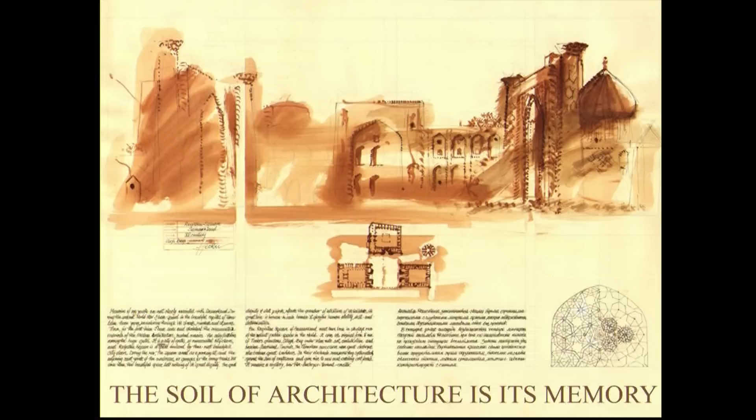Thank you very much for inviting me to give this lecture in memory of Michele, who was an architecture student. I spoke with Silvia, his mother, and I'm very proud to be here.

You should also know that the father of David Palterer, who spoke a few minutes before me, was an architect, and he was like my teacher. So generation after generation, we pay respect back to those who have been our teachers. I see in David Palterer a continuation of what I was studying.

My lecture is not so much about what you see, it's about what you don't see. I came to the conclusion, speaking mostly to architecture students, but here we have another audience, that very little is spoken about what makes architecture, how you make it, what is behind the glossy photographs we see in journals.

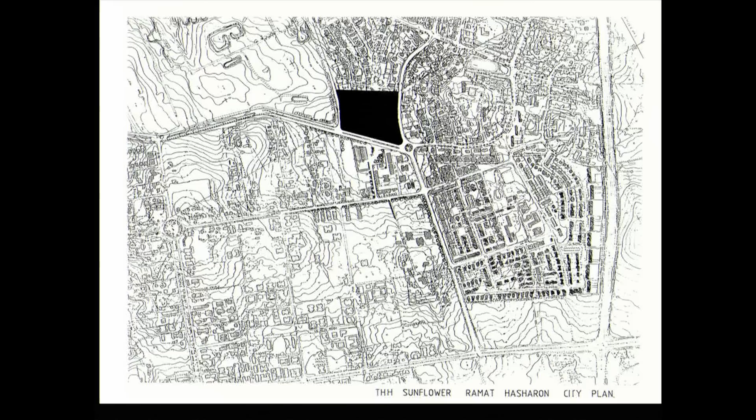This is a project not far from Tel Aviv, in Ramat Hasharon, when I was asked to design a housing project in the center of the city. I started with some sketches, where the round point, the lower point, is a commercial center.

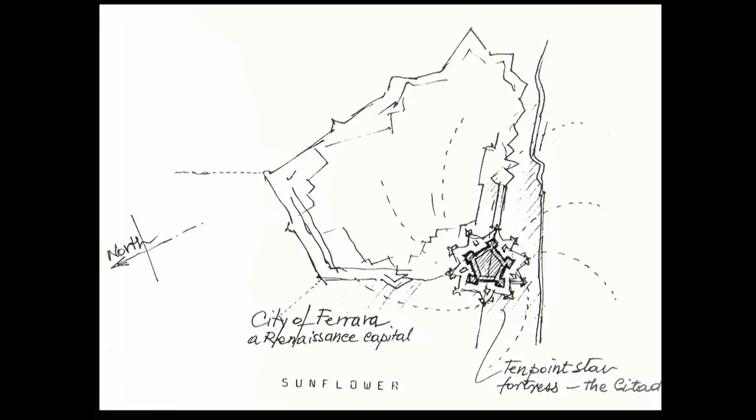In Tel Aviv, since I'm speaking about my work in Israel, there was an exhibition on the city of Ferrara and its walls. I thought that this citadel of Ferrara could help me design my project. The city of Ferrara is now a citadel, but in my design it's the commercial center, which starts to influence the other parts of the project.

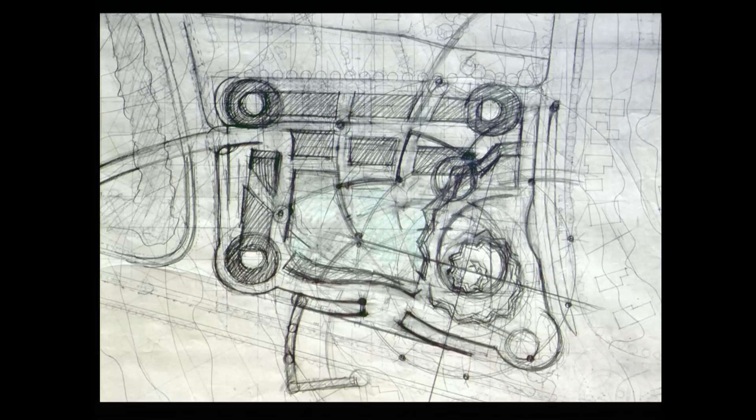You see the development. I still don't know where I am heading, but I am trying. Gradually it became a kind of geometry of a sunflower. So it didn't come directly because I wanted it to be a sunflower, but I borrowed the citadel of Ferrara, and something happened. You see all these drawings which I used as a vehicle to arrive somewhere.

One can say that these drawings are evidence that I don't know what I am doing, because if I knew what I was doing, I would not need to make those drawings. That's the perfect evidence that somebody does not know what to do. But at least it has some form, some maybe beauty.

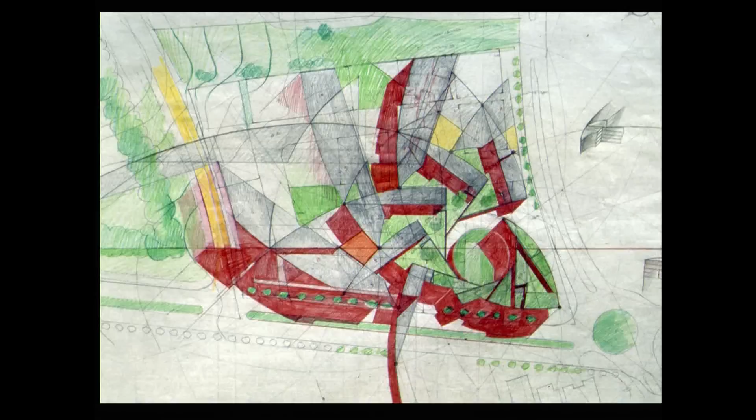And so on and so on. Gradually I know a little bit more about the project, about the destination.

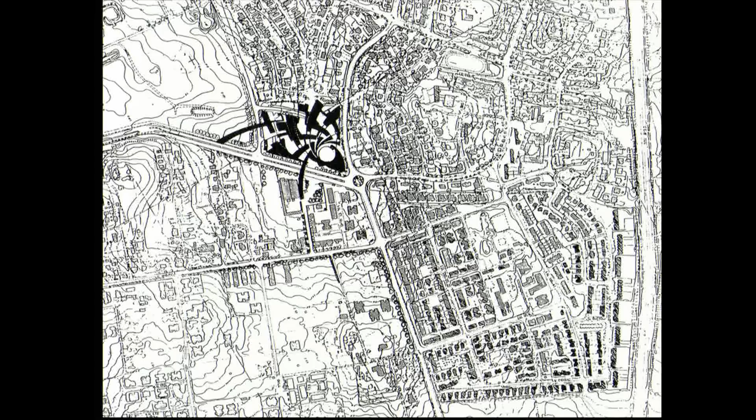And just when I knew already how to build this project, the city of Ramat Hasharon told me, thank you, we are not interested in your project. So it took only four years to arrive at this point. The question is whether this is a lot of lost time, or maybe this investment of four years working on this project is not completely lost time.

And then there comes a project which is letter C. Letter A is a project I did with Alfred Neumann and Eldar Sharon in the 60s, but I'm not speaking about that one now, I'm speaking about a more recent project. C is a kind of spiral building which eventually was built.

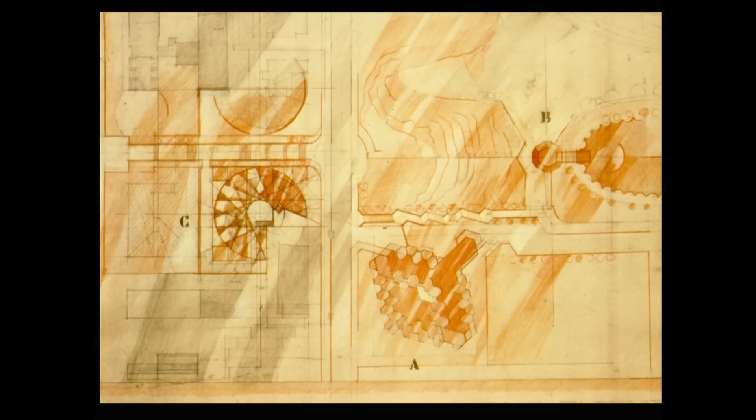It's in Ramat Gan, Israel, not far from Tel Aviv. The spiral was somehow in my mind already for some time. And here you see the building.

I would say that without the work I had done on the first project, it would be difficult to imagine that I could build this one. So, in my opinion, that first project was not totally a waste of time.

This is an apartment building with only 8 apartments, one on every floor. So it's like detached, like a private house on every floor.

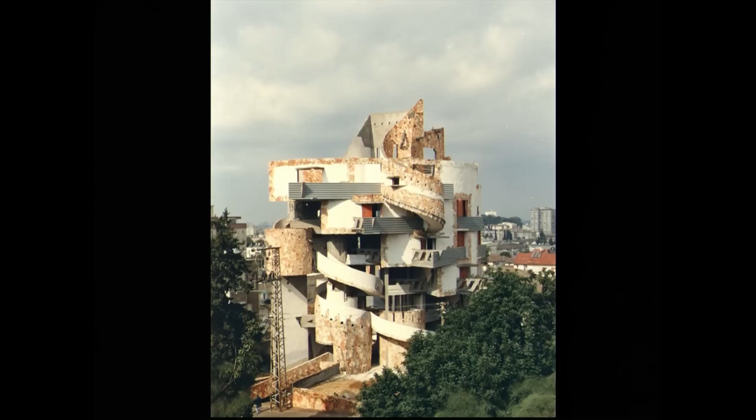The use of material is special, a kind of arte povera. I was supposed to make a project with Mario Merz, but we ended up drinking too much vodka, so nothing came out of it at the end. That was in Torino. He made a beautiful igloo in the Jerusalem Museum, and I was helping, but by the time I came to Torino, there was already too much of this liquid involved.

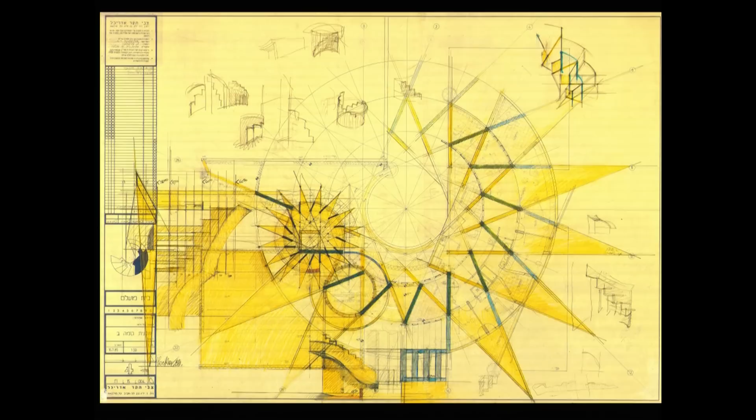And those are some drawings which helped build this project.

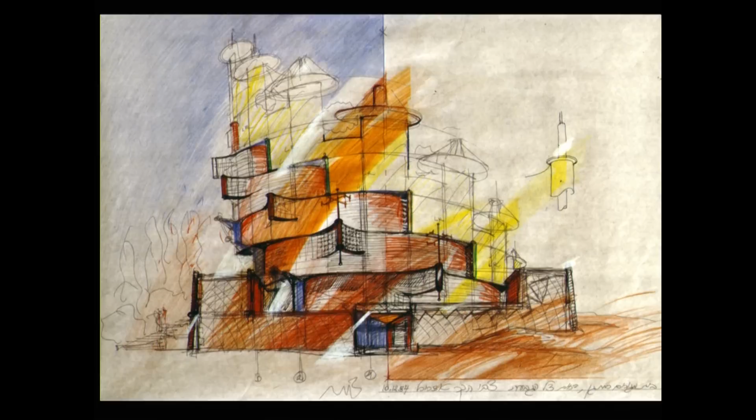All these were made during the work on the spiral and during the construction, because I was living opposite in the so-called Dubiner house, which was designed 20 years earlier. So these drawings were really intended for the construction already.

You see the progress of the images, how the building eventually developed. The development of the special building was also due to the fact that the construction was in the hands of somebody who didn't know how to make a straight angle. So by covering the corners of the building with stone, we camouflaged this impossible kind of work. But eventually it came out okay.

Eventually the normal logic of such a building, every architect will know, is you put in the middle the staircase and the elevator. That would be the most economical and most rational solution. But I wanted to have a courtyard in the middle. So there was another way of solving it, and another rationality.

We also used materials we got for free, like broken mirrors. And this kind of stone is very cheap stone in Israel, hated by all the architects because it has a connotation of cheapness, since many restaurants in Jaffa are covered instead of stucco by this stone. But I thought it's very eloquent, very expressive.

And the view of the terraces.

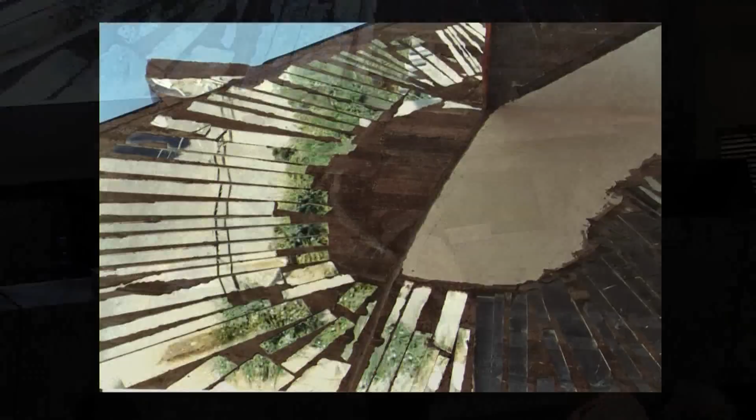Interiors. And the use of mirrors inserted into the concrete before the concrete was cast. Because the expansion of concrete and of glass is the same, they are not broken, they are not falling down.

That's another project which David Palterer mentioned, a school in Germany. I would say that's the next example of something where you still benefit from what you have done before. So here also this spiral movement is very important for the design of the school. But what is more important is the central open court, which was also in the spiral building, but also here.

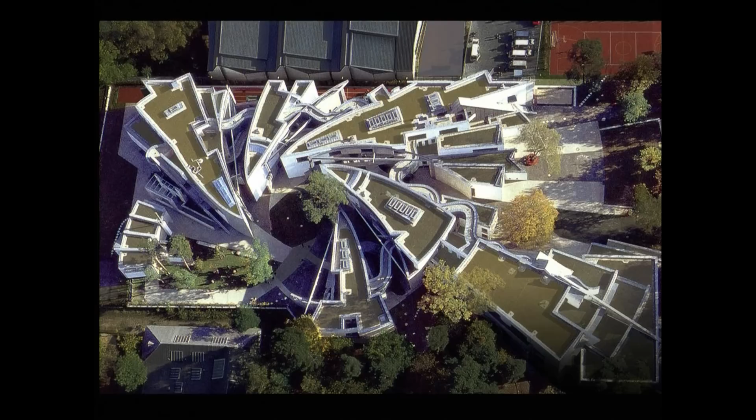So the central space is for humans, not for materials. As we evacuated the stairs and the elevator in the spiral building, the same happens here. The open space is the entrance, and the buildings enclose this space.

That's the geometry done before the computers, so it was done by hand.

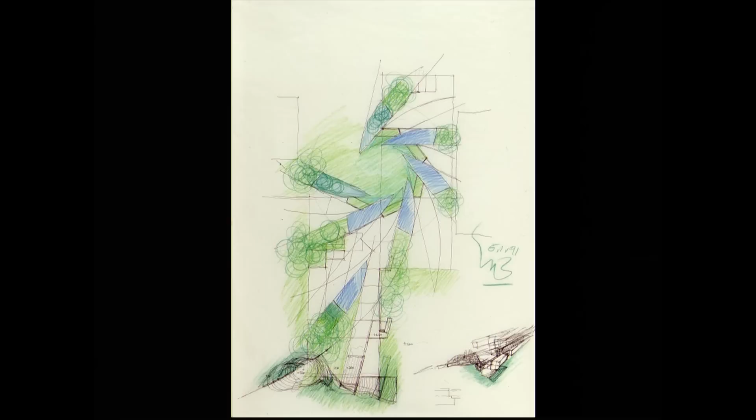And again, some sketches which for me are the way of transport to the unknown destination, which I mentioned before.

As I said before, it's not modesty that I am saying this, but it's really evidence that somebody who is doing it doesn't know where he is heading. He maybe had some more or less direction, but every one of these drawings is a hope that it will bring me closer to something which I believe I should arrive at.

I was so desperate that I introduced even a snake into the design.

Sometimes it's necessary to bring something which doesn't fit into the design, and eventually it breaks, and sometimes it brings a new element. So this element of the snake did a lot of good for the design, because it brought all the pieces together, and the children liked very much running through these corridors.

And that's the entrance. So eventually you don't see any snakes, any sunflowers, and people said that it's like a small city for children. So it's not really a sunflower, but I would say rather a small city.

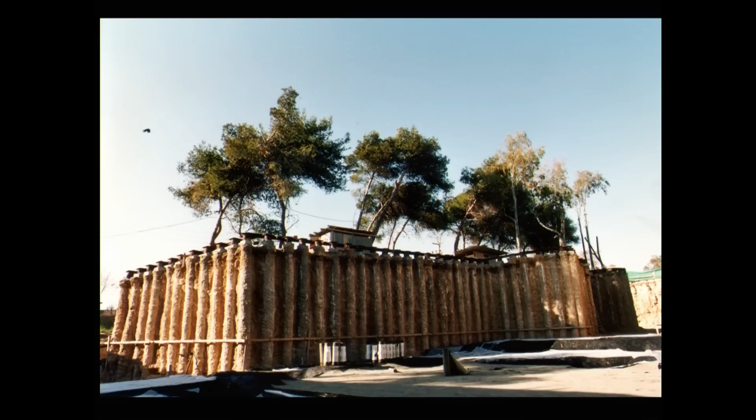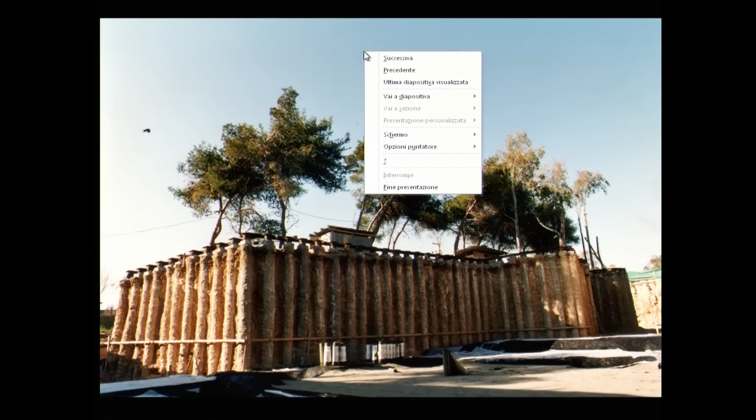So digging for the basement, we had to preserve the trees. In order to preserve the trees, one has to preserve the soil of the trees. So that's the way we preserve the soil, by surrounding it by kind of concrete nails, and then we took out the soil surrounding these nails, and in this process we discover a kind of very fragile stone.

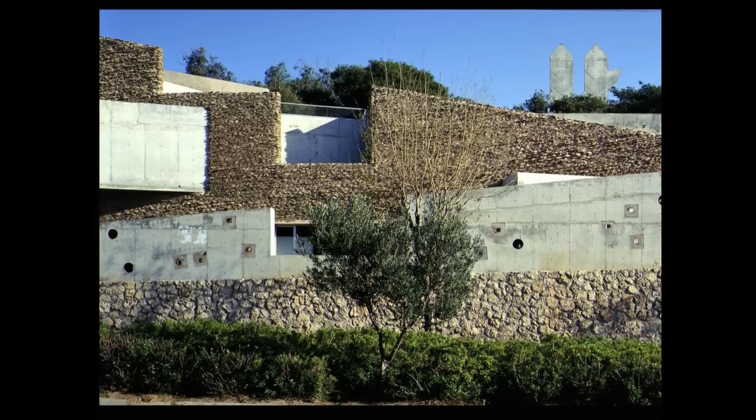Very fragile stone, you see this stone, and we try to use it. And you see that now the stone is used on the elevation of the building.

The Palmach also claimed that they come back to the soil of Israel, that they are the natural extension of the Jewish settlement in old times. So the very fact that the stone is also from the same soil means for the people of Palmach and the next generation a kind of link to the country. And they identified themselves very closely with this building.

That doesn't mean that they don't slowly destroy it also by making all kinds of projections.

There is a slope of the street, a slope of the terrain. Actually, we have done nothing special. We have surrounded the trees, and you see the trees growing already as part of the architecture. So the whole building is cut around the trees. This courtyard takes care of the trees, and the slope of the street also makes the slope of the building.

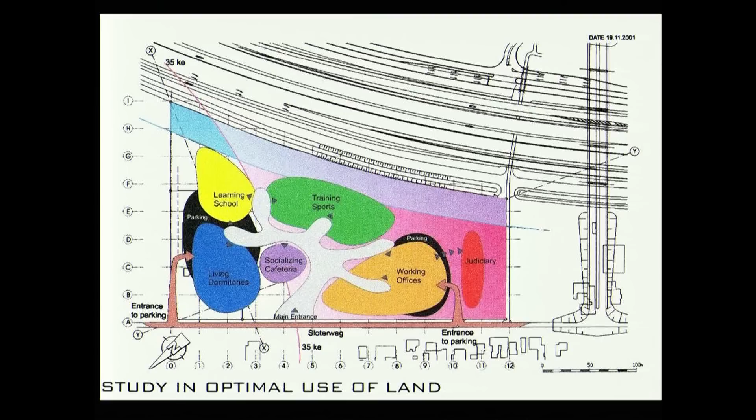That's a program, that's a site which is like 300 meters long. On one side, at the top, there is a highway entering the airport, and those are offices, dormitories, restaurant, school, sport - everything is there.

There was in my mind, it was also a kind of idea that it should be a kind of citadel or kind of medieval city - military, those are drawings of Michelangelo, but it came a little bit different.

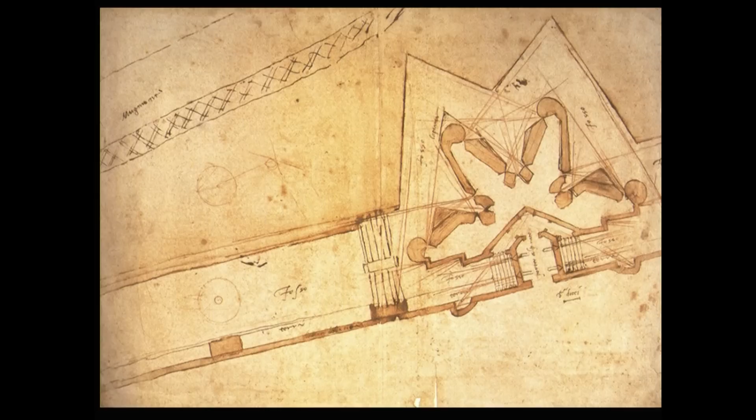So here I started to understand the site and what could be done. The center is always the open field. So again, the idea is to make buildings in such a way that people are protected by the buildings. So not only to enter the building, but also that the building will make an outside space which is a kind of extension of the interior.

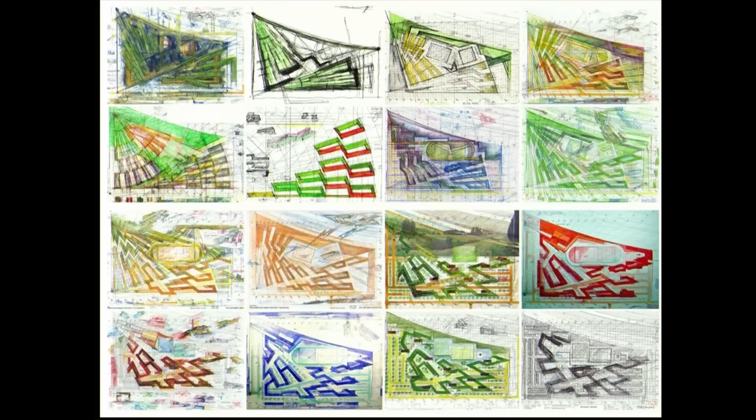And again, you see that I tried to use the drawing as a kind of vehicle to arrive at a certain destination, which is not clear where. The drawings themselves show that it's not clear where it is.

But eventually, the plan is very simple. On the right, there are offices. On the left are dormitories. The green part above is a school. Yellow in the center is the dining hall and some spaces for cars and so on.

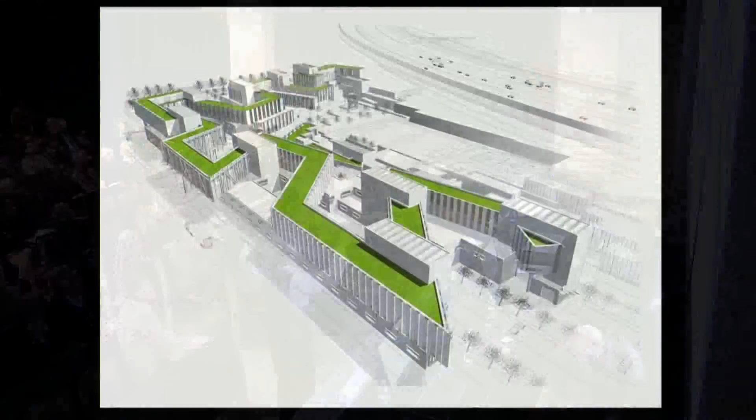So actually it's like a small city with a wall, but with one difference - the wall is actually the city, because there is not very much except the wall. But everything is concentrated around the open space, and the restaurant is a kind of, I would say, a living room that is facing the open space, and people can sit on the terrace and look at the sport.

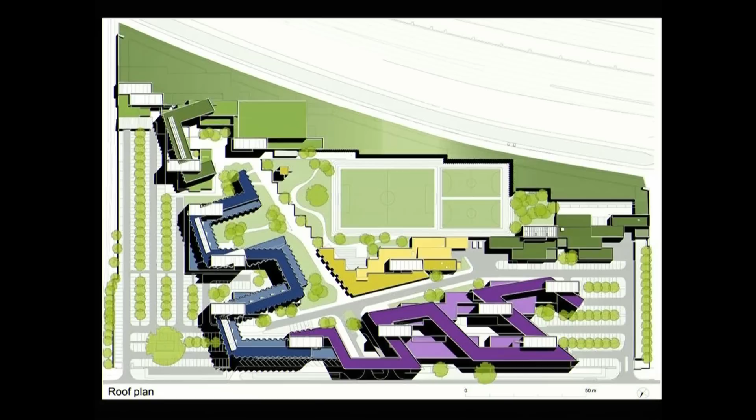So there is, in the middle bottom, there is an entrance. There is, like I said, the offices, which is like your study. On the left, bedrooms, but there are dormitories. I would try to explain it as a kind of small house, but it's a big project. In the center is a living room with a dining room, which is overlooking the garden, and then you have your gym and so on. So even if it's a big project, it still has a kind of logic of something which one can understand.

Those are the images.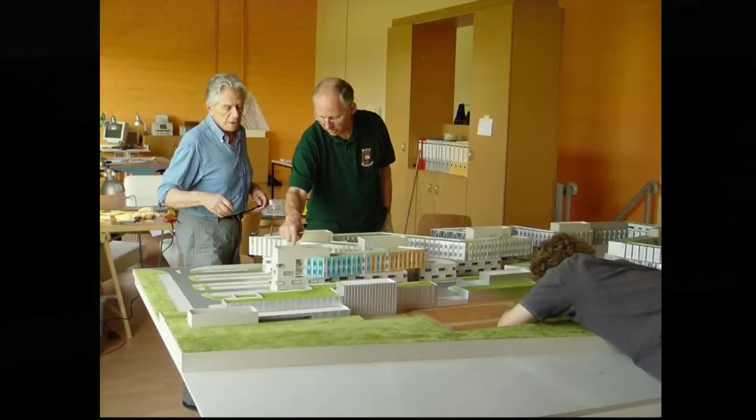And here, Colonel Brandenburg - he's not in his very beautiful military outfit, but he was my boss - and I am explaining him the project. And he listens, and then he shakes his head, and this cost me like 3 years of stopping the project.

The project was stopped because he couldn't believe that it could be built within the budget that we had. So his head shake on this was very expensive. It was like more than 2 years of waiting until we got more funds for the project, but eventually it's under construction.